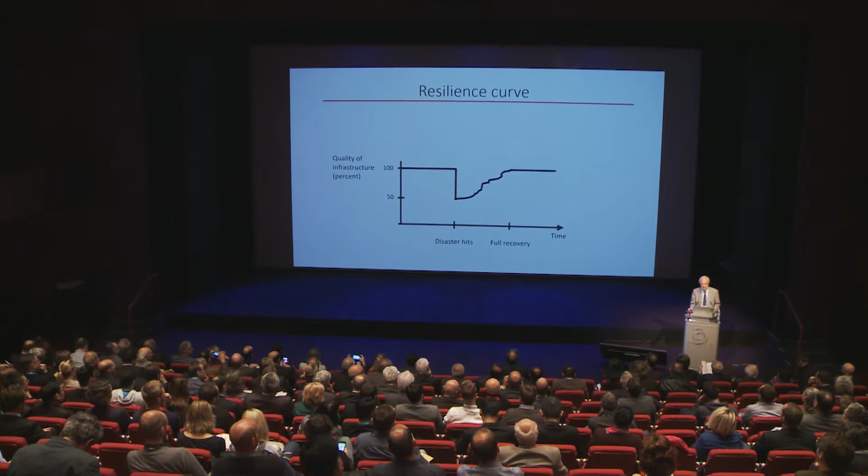This can be explained by looking at the so-called resilience curve, which shows the quality of infrastructure versus time. At the moment an earthquake hits, there is a sudden drop in the quality of infrastructure. If the structures are seismic resistant, this drop is small and recovery is quick. If the structures are not resistant, the drop is very large and the recovery is very costly and takes a very long time.

An extreme example is Haiti. As you know, there was an earthquake in 2010 with catastrophic consequences. The magnitude was not so large, it was only 7, but the consequences—death, wounded, homeless—were catastrophic. This was the most destructive earthquake that any country has experienced in terms of the number of fatalities relative to its population. The reason for this was inadequate construction practice due to poverty, lack of professionals in the construction industry, and no seismic code.

Another example, on the other end, is a developed country, Chile. In the same year, the magnitude was much stronger. Magnitude is a logarithmic scale, as you know, and this earthquake was almost 1,000 times as strong regarding the energy. In spite of this energy, the number of deaths was relatively low compared to the magnitude, but the damage was still extensive.

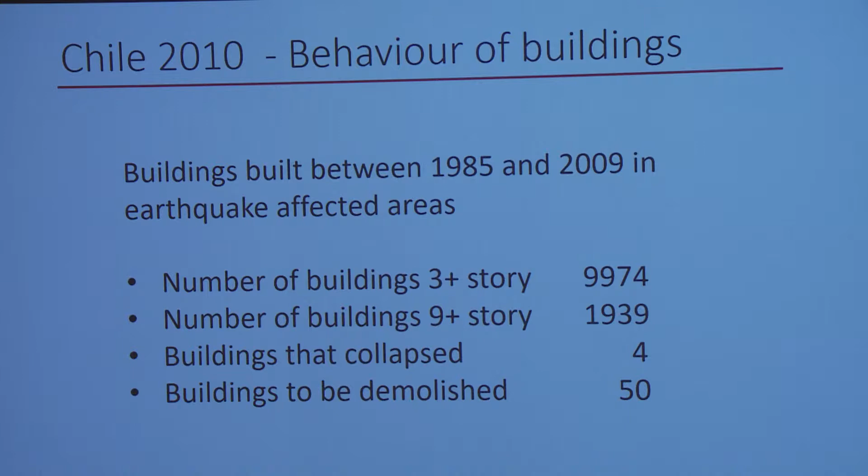So here we experienced very good behavior of engineered structures. Some data from taller buildings built in the last 20 years before the earthquake: only 4 buildings collapsed and 50 were to be demolished. This experience can also be followed and seen after other earthquakes.

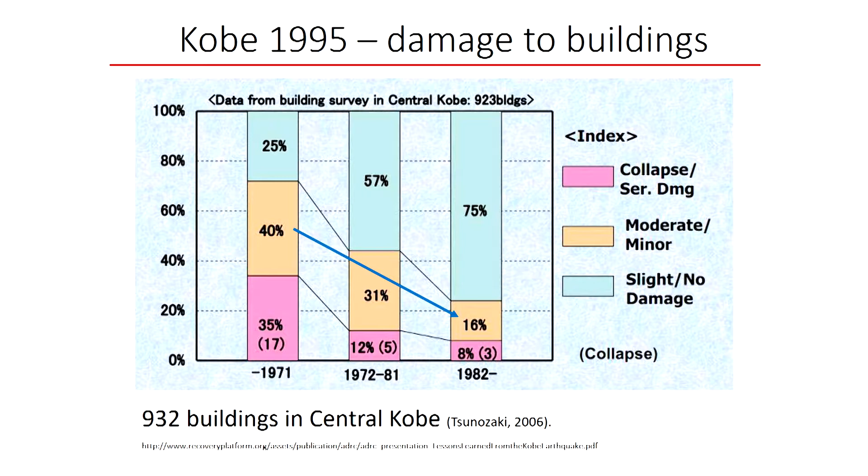So what we can see is that modern seismic codes are able to prevent, more or less, collapses of buildings. One example from the Chile earthquake: in the most hit area, the city of Concepcion, we found a building, a parking garage, without any single crack. But unfortunately, in the same city, there was one of these 4 buildings which completely collapsed due to some problems in design.

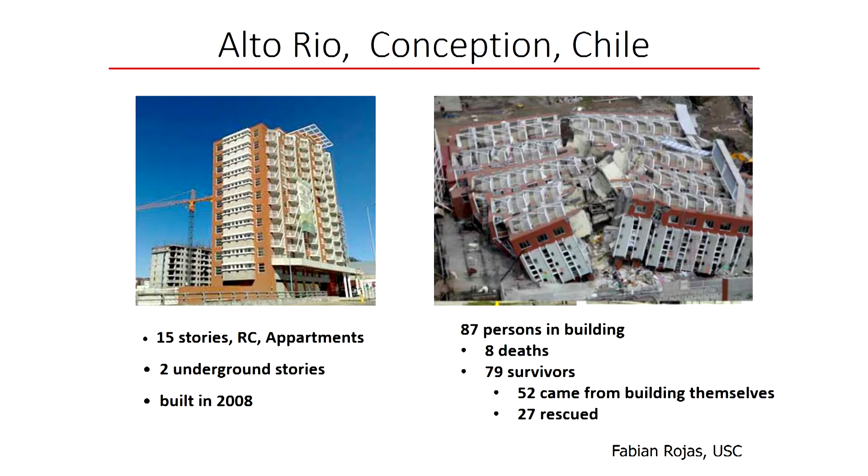This is the building Alto Rio before the earthquake. It was built just 2 years before the earthquake. It was an apartment building, and this is it after the earthquake. Still, it's difficult to believe, but 79 people survived this collapse.

So what we can say for new buildings is that modern codes provide seismic resistance if they are implemented in design and construction. So what is the potential problem? Review of design and control of construction. Earthquake-resistant design is not completely trivial, and some skills are necessary, and without review, things like what we showed before can happen.

I would like to emphasize something not very well known to the general public: the seismic code is mainly about saving lives, not buildings. For example, the aims of Eurocode 8, the European standard for earthquake-resistant structures, are three: human lives are protected, damage is limited, and structures important for civil protection remain operational. So please note, damage is limited, not prevented. This is for economic reasons.

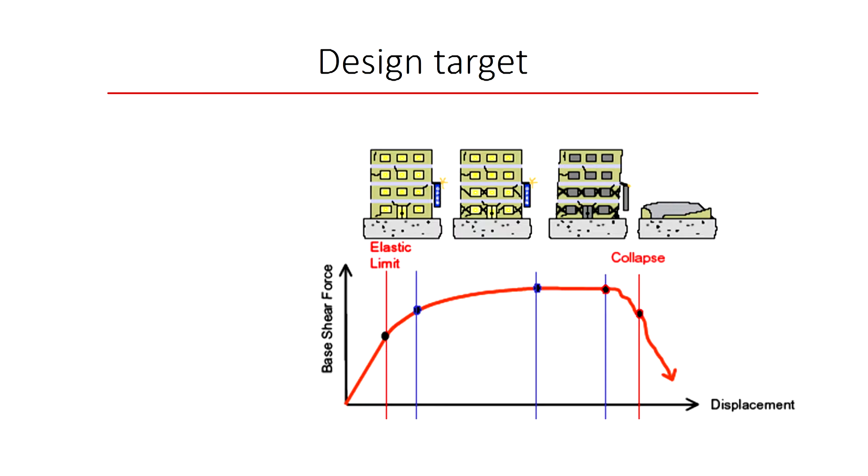I will try to explain this with a load-deformation diagram. In a usual situation, with vertical loads and small wind load, we are in the elastic region, meaning no damage. But in the case of earthquake, we design for rare earthquakes, about a 500-year return period, with about 10% probability in 50 years, so relatively low probability. So we design for life safety, not for preventing damage, for economic reasons, because earthquake-resistant design costs something.

Because of this, the tendency in most developed countries, like New Zealand, which had a very bad experience with the Christchurch earthquakes some years ago, is to decrease the damage, changing the design philosophy from life safety to less damage. But this costs money and takes time, and not many countries can afford it.

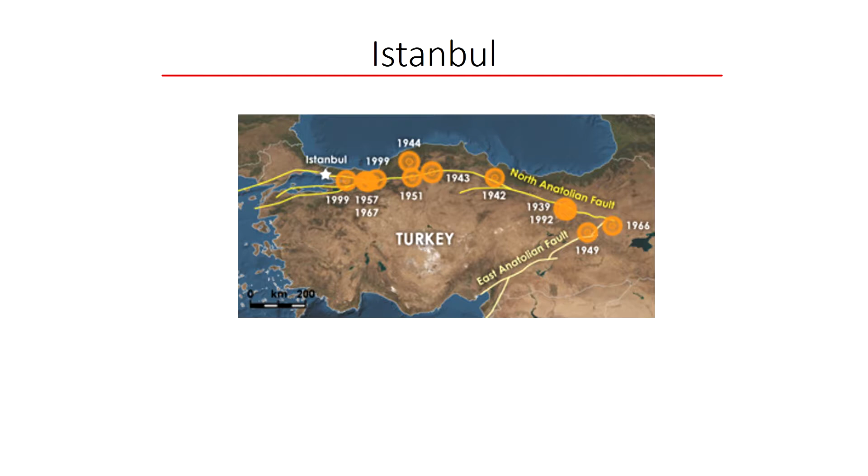This is one of the cities with the highest seismic risk in the world. What can be done? Unfortunately, not much.

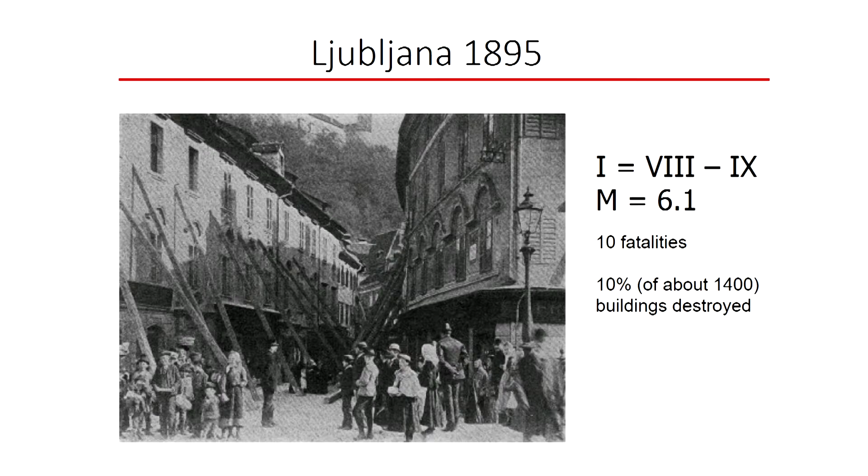A few words about Ljubljana, the city where we are today, my hometown. In Ljubljana, a moderate earthquake of magnitude 6 occurred in 1895. Ljubljana is not a big city, and at that time was even much smaller, but 10% of buildings were destroyed and removed. At that time we lived in the Austro-Hungarian monarchy, and the next year a building order was issued requiring measures for unreinforced masonry buildings.

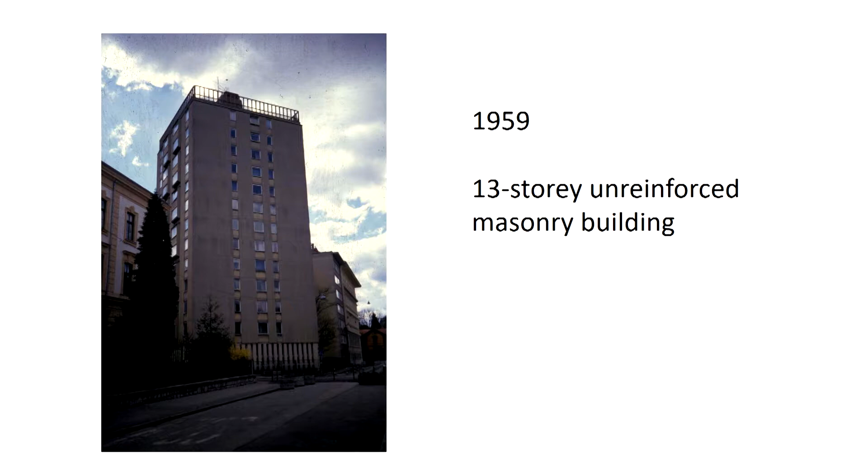But then, after the Second World War, there was a time of poor quality, quick construction, without seismic codes. At that time we had no seismic codes, and some buildings like this were built in Ljubljana. This one was built in '59, a 13-story unreinforced masonry building. You can see when the facade was removed, I took these pictures, that this is unreinforced masonry. According to today's standards, it could be maybe 2 or 3 stories maximum, not 13.

There are several buildings like this in Ljubljana with no seismic resistance, and you can even see that in one building they added an extra story on top. So what to do with these buildings? No, these are apartments with private owners.

Retrofit is expensive, and it's not only a financial problem, it's a problem of logistics. People have to go out for the period of reconstruction. So I'm afraid this is mission impossible in many cases. It was easier with a student dormitory, where the owner was the state, so there was no problem of logistics. This building was built in '63, demolished in 2004, and rebuilt in 2006. This is the easiest solution, of course, but not applicable everywhere.

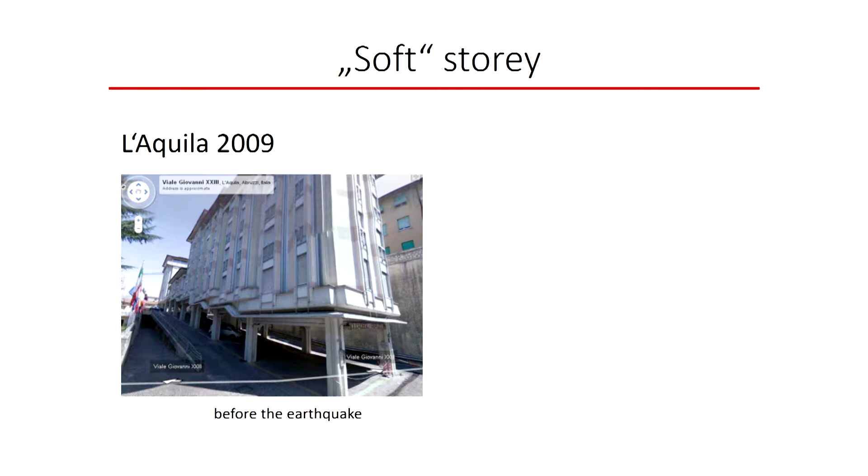So a few words about soft-story buildings. I always told my students this is enemy number one of seismic behavior. This is a hotel in L'Aquila before the earthquake. Everybody who knows something about earthquake engineering knows that such a building cannot survive a strong earthquake. And this is what happened in the earthquake—many people died here. I could spend my whole presentation just showing collapses of soft-story buildings.

I will finish my examples with the retrofit of an unreinforced masonry building. This is a building in Ljubljana, more than 100 years old, with wooden floors. What we did is a retrofit—we put ties from one facade to another to prevent the walls from falling out of plane. Actually, this happened to be my building, where I live.

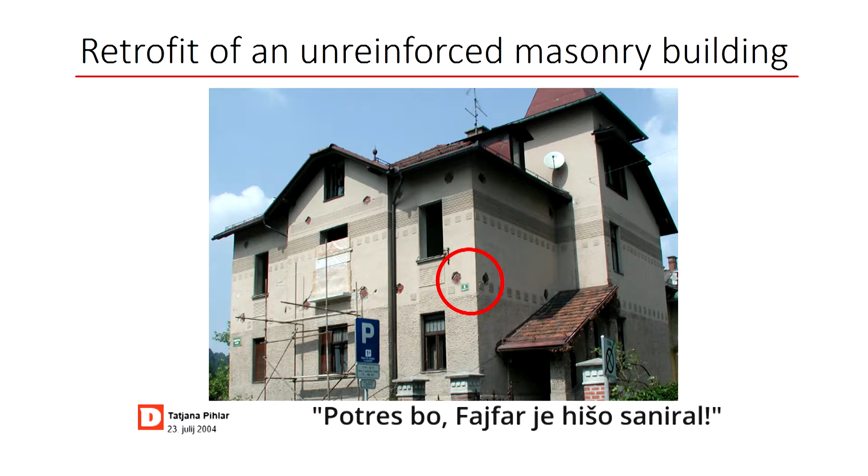Very soon after this retrofit, a moderate earthquake happened in Slovenia, and journalists came and we discussed different things. I mentioned that I had retrofitted this building, and the next day there was an article in the daily newspaper: 'potres bo, Fajfar je hišo saniral'—meaning an earthquake will happen, Fajfar fixed the house. You know this joke: there will be a very cold winter, the Indians are preparing firewood like crazy.

So let me conclude. Earthquake resistance of structures is the key element of seismic resilience. As far as new structures are concerned, codes are okay, but they have to be observed. Of course, they do not prevent damage, but the tendency is to minimize damage. The problem is old structures built before codes, or built without codes—there, retrofit is needed. Of course, not everything can be retrofitted, but it's reasonable to start with schools and hospitals.

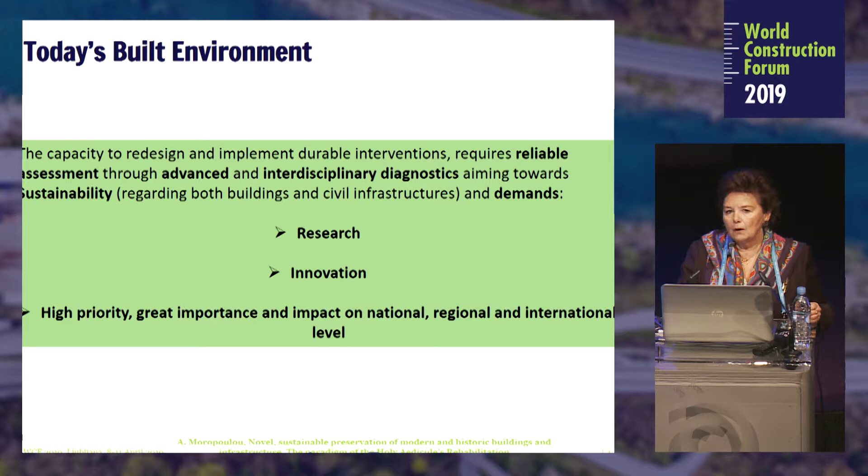At the same time, it is not by chance that 40% of the construction activity is dedicated to maintenance, conservation, and rehabilitation of buildings. At the National Technical University of Athens, we are dealing with the science and engineering of these efforts, and we know very well that research and innovation are the background on which we have to found this joint effort.

In our case, our experience in monuments preservation and concerning the monument rehabilitation, I'm going to present the Holy Aedicule of the Tomb of Christ in Jerusalem.

I might say that heritage is a lesson for all of us. Preserving heritage, we are talking with the monuments, and monuments are talking to us. And this is a lesson to learn concerning the preservation of our built environment and the resilience of our infrastructure.

As I've heard, and I was very pleased with this note from the UNESCO representative, it is a conscience of today that interdisciplinarity, merging capabilities and know-how, is the scientific basis in order to perform rehabilitation. Within this effort and the specific experience of the monument we dealt with, this unique monument is associated with communication, social awareness, and participation of humanity, which was enhanced and was necessary in this direction.

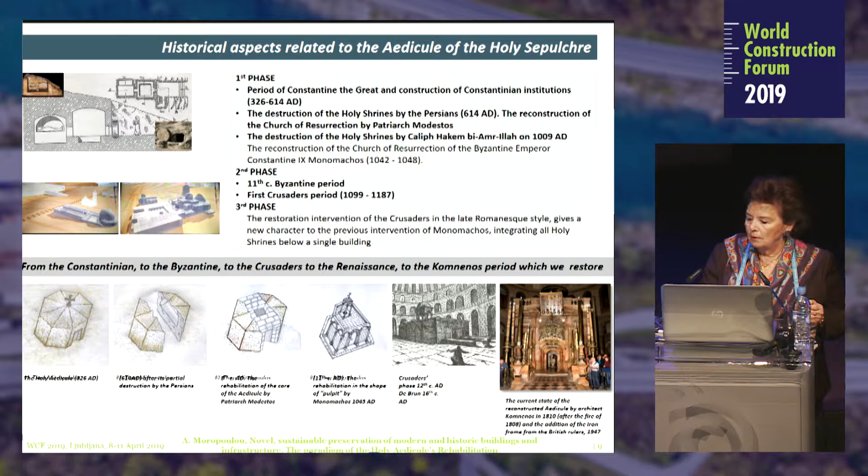The Holy Aedicule of the Tomb of Christ was a structure that from Constantine the Great passed through Byzantine, the Crusaders period, the Renaissance period, and the last restoration before ours, the one of Komnenos in 1810. The Ciborium, which is actually the specific structure to protect the Tomb of Christ, went from the octagonal structure to a columned structure, the Ciborium actually, to the mausoleum of the 19th century, the Baroque one.

Which we received absolutely deformed and sustained by the English mandate in 1947 with iron beams in the cage form you can see preserved, and which we delivered one year later in the form you can see.

This project started with the invitation by the Greek Orthodox Patriarch Theophilos III, and this was the reason that on March 15 this venture started, because for security reasons to the pilgrimage, the Israeli authorities closed the Tomb of Christ to the people.

I had the honor to comprise an interdisciplinary working team: Professor Korres from the School of Architecture, Georgopoulos from the School of Surveying Engineering, Spyrakos and later Mouzakis from Civil Engineering, and me from Chemical Engineering, Material Science and Engineering for the Protection of Monuments, leading this team. The methodology of the research concerning documentation, diagnosis, and the proposals for the intervention were integrated.

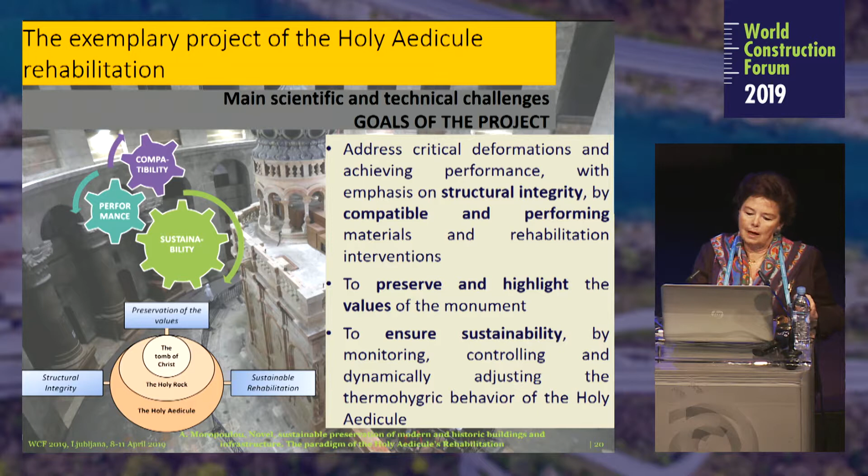The integrated coordination had to satisfy three goals: structural integrity with compatibility and performance, sustainability, and the revealing of values. Innovation was at the core of all this effort.

The interdisciplinary project was based on 3D digital documentation, a dynamic core space to integrate all information, to merge and fuse all capabilities and know-how. Architects, surveying engineers, civil engineers, chemical engineers, restorers, conservators, information technologists and engineers, archaeometrists, archaeologists, historians of art were working together, providing the basis for transdisciplinarity beyond the frontiers of engineering.

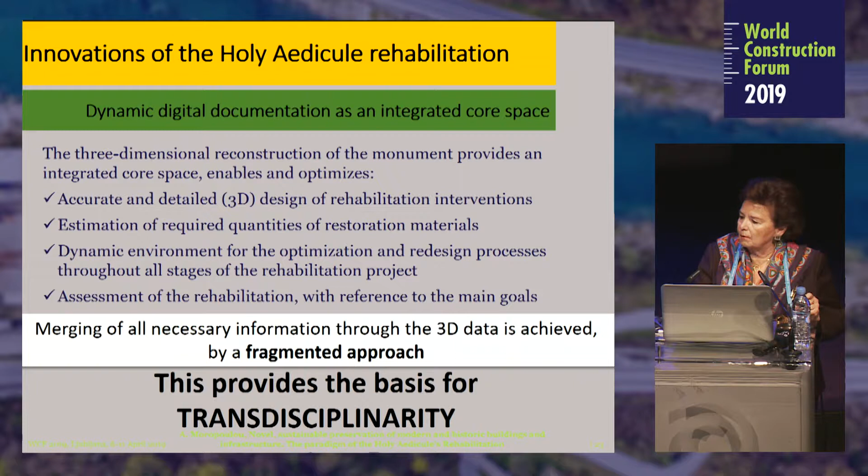Within the 3D digital environment, we were capable of performing continuous monitoring with non-destructive techniques to assess and evaluate our interventions, so that we could optimize our redesign if necessary, in real time, on the scale of the monument.

This innovative inspection of the non-visible layers of the Aedicule was really a major tool for the rehabilitation. You might see how ground-penetrating radar permitted us to estimate where the holy rock is, where the masonry of the various periods was extending, and to design the necessary interventions accurately, estimating materials at the 3D level of the model we were working with.

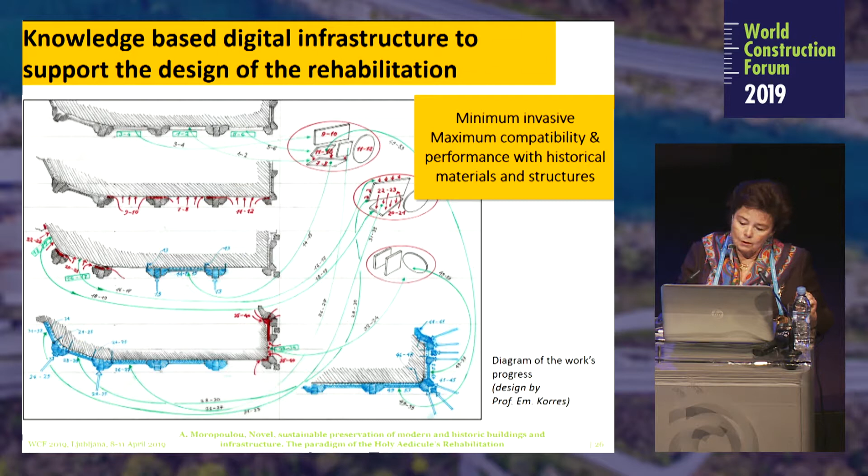The geometric documentation and materials characterization, along with the architectural documentation, permitted us to perform the structural assessment through realistic and dynamic finite element models, so we could select materials and structures for structural interventions within the time limit we had, with a project planning that was very accurate and very strict.

Compatible and performing materials were ensured by this integrated study, a first step for sustainability. I remember presenting 30 years ago at the European Parliament that if we have to sustain historic structures, we have to work with compatible materials, not stronger materials. That was the time we started to abolish strong materials, cement or resins, from retrofitting historic structures.

So here we ensure breathability and thermohydric behavior. We do not induce anisotropy. We have adequate mechanical behavior, and we do not introduce soluble salts, but mainly we aim for homogeneity, a homogeneous structural system. The iterative process of the main stages of rehabilitation was...

...one that started with removing the slabs of the Aedicule, retrofitting the inside masonry, and removing the degraded mortars, unifying the structural system by grouting, injecting compatible grouts, resetting the columns, sustaining the systems to be stuck together with titanium bolts and anchors.

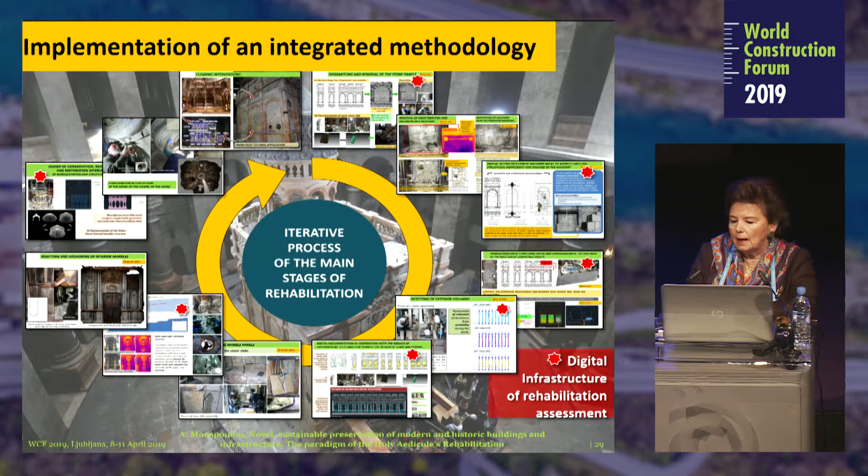For this reason, we organized upon the Franciscan Gallery the conservation laboratory where the numbered stones were removed, brought and conserved. We also organized, beyond the Tomb of Christ, an interdisciplinary laboratory in order to monitor all the phases of the works, and the teams were working day and night.

During the night in the Holy Aedicule, so that pilgrimage and the functions would not be ceased, and during the day at the Latin Gallery. The scientific team united these two ends of the 24 hours, working continuously in Jerusalem and Athens.

The implementation methodology was innovative in that the construction site was continuously open to pilgrimage, and the funding was crowdsourced. We started with zero, initiating the work with the World Monuments Fund and Mika Ertegun as a benefactor for one third of the cost, 3.5 million euros, with transparency, uploading all costs to the site of the Greek Orthodox Patriarchate.

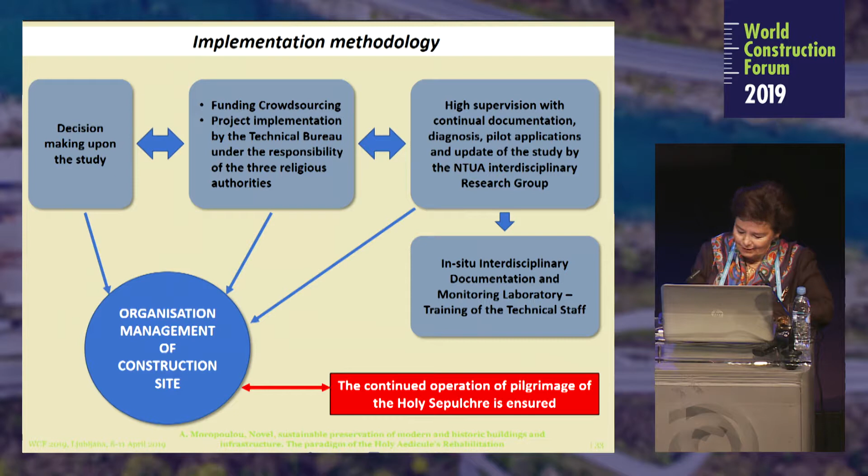We continued with the integrated management of the work, where the project owners committee, the three leaders of the Christian communities, worked with us in the steering committee; the interdisciplinary scientific team in green, and the construction site management team in blue, all working together from interface to interface, on the basis of scientific support by the assessment of non-destructive techniques.

Here you might see, for instance, how the assessment of the effectiveness of the grouting process was advanced by NDTs, in order to secure that the Holy Rock was consolidated, and to ensure that the interface with the Crusaders' masonry or the Byzantine masonry would be unified.

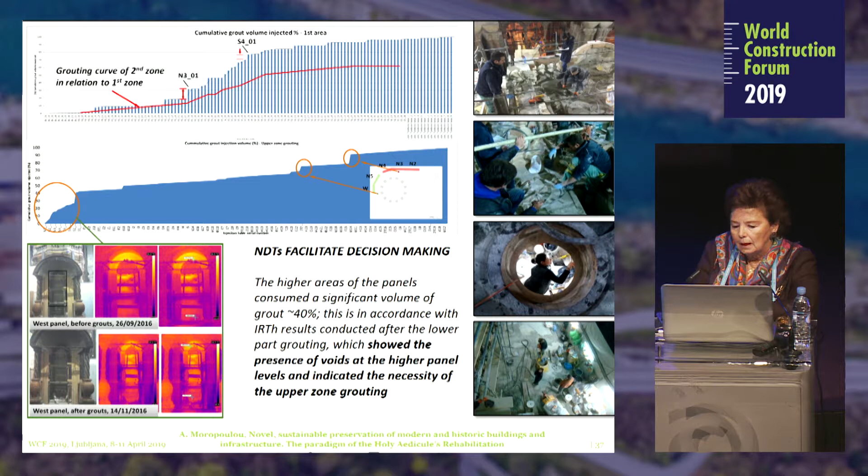The process of the works was facilitated by decision-making made on site upon the indications. For instance, the colors of the infrared thermography were indicating where we had voids to continue with grouting, or the ground-penetrating radar permitted us to assess that we had indeed consolidated the structures.

That means the innovation of non-destructive testing permitted, in all phases, documentation, diagnosis, monitoring, assessment, and implementation to perform the whole intervention upon the set criteria. At the end of the works, we had to ensure that this innovative methodology achieved the goals set: structural integrity, highlighting the values, sustainability.

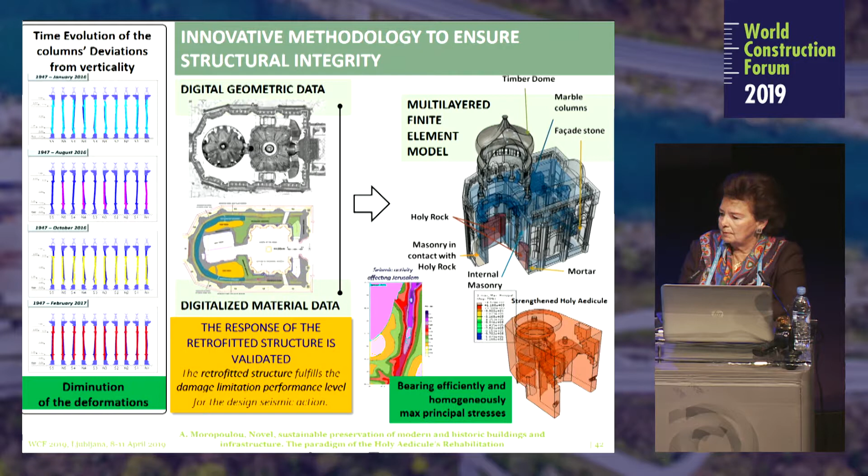When we assured, in comparison to the Freeman Report of the English Mandate of 1947, on February 2017, that we diminished the deformations and that the deviations from verticality arrived to zero, and that the bearing efficiency of the homogeneous structure was responding to the earthquake risks of the area, we cut the iron beams and we emancipated the Tomb of Christ.

The most important moment of this effort were the 60 hours when we opened the Tomb of Christ during grouting, in order to protect it from irreversible intervention. That was a unique moment because after 7 or 5 centuries, according to the historic sources, the Tomb of Christ was opened at a period when we had at hand the high technology to study it and reveal its secrets.

Non-destructive techniques permitted us, after a period of time when the energy disturbance of the atmosphere was coming to an equilibrium, to study the morphology of the burial monument, and by taking samples of the mortars that were connecting the slab upon the rock where the tomb was engraved, and the upper slab, the one we lifted.

We were able, through archaeometry, to estimate that it was Constantine the Great who put the first slab, protected and revealed the Tomb of Christ, and that during all periods of restorations, after a sequence of destructions, that means during the Byzantine, the Crusaders, the Renaissance period, we have evidence of the presence of these restorations.

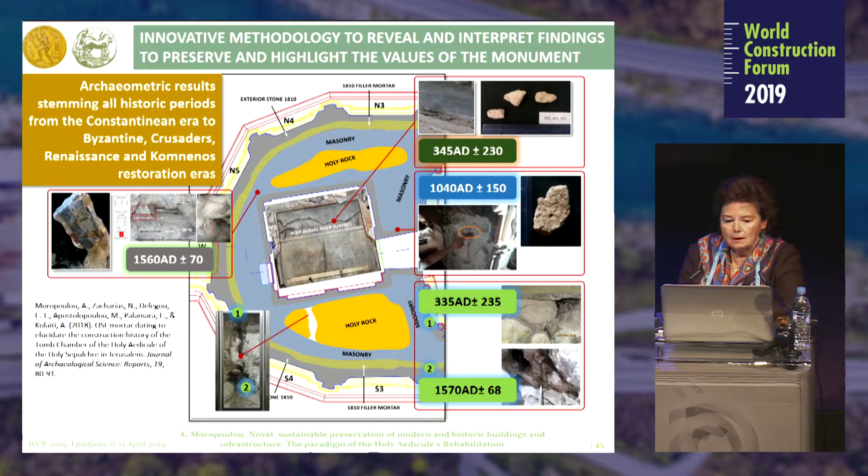That means the historic continuity of this unique monument was in front of our eyes, and it was ensured definitely by high tech.

Revealing the holy rock, the archetype material of the burial monument, through opening a window, was the first opportunity in centuries that pilgrims would see the holy rock.

Revealing the frescoes was bringing the myrrh bearers back to the burial monument, or restoring the dome, the timber structure, and revealing the moon, the sun, the rainbow.

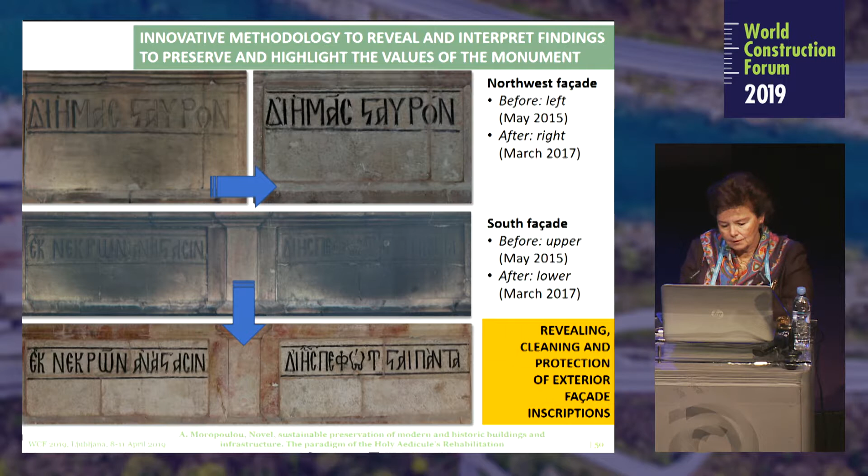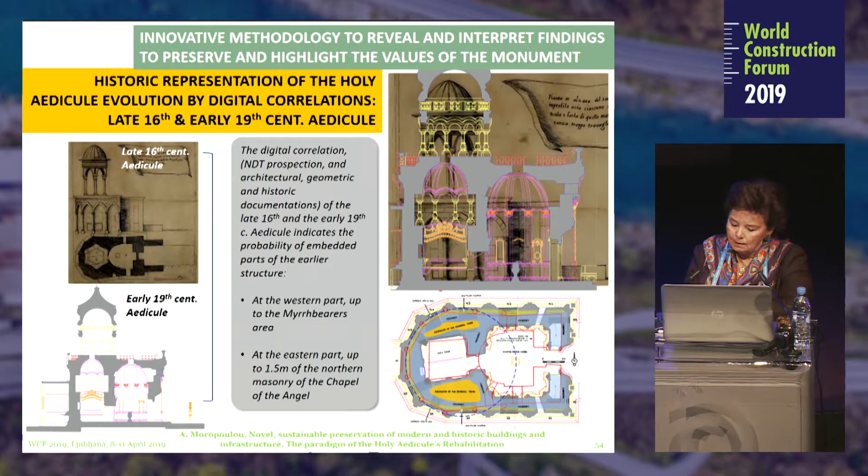Which enabled us, at the end, in the digital infrastructure we constructed, to study the architectural evolution of the monument during the centuries.

But concerning sustainability, a window is open to the future. The risk assessment shows that the rising damp of the underground area is still threatening this unique monument.

That was the reason that by delivering the monument in March 2017, we delivered the study to reveal the underground problem, which we could not do before. We did it, we studied while we were working.

Here, through robots, ground-penetrating radar, electrical resistivity survey, and electromagnetic probe systems, we revealed all the channels, tunnels, cisterns, the places where the rainwater from the Christian Quarter Road 10 meters above was falling, and the sewage system of the whole Holy Sepulchre, which was disposed underneath the Holy Rock.

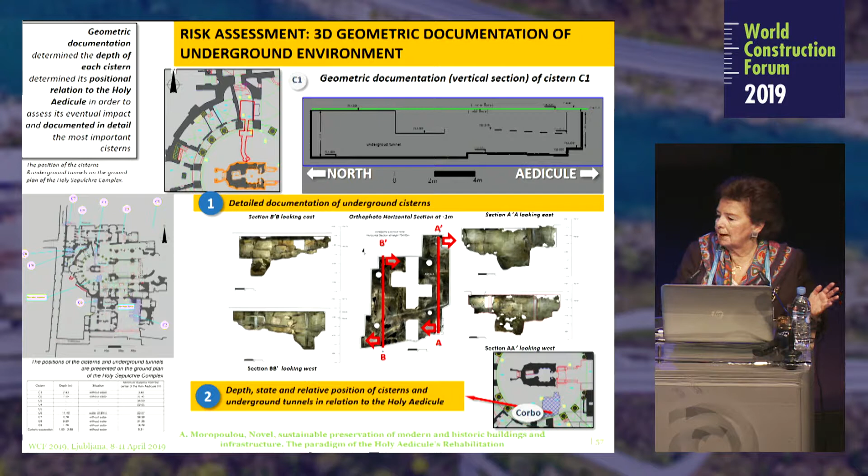We geometrically documented this, and found all the archaeologically important structures from Adrianos or from Constantine the Great, and studied a drainage and ventilation gallery which would underpin the Rotunda area, the general area, with a peripheral piping network for sewage and rainwater disposal, in order to negate the differential settlement of the Holy Rock, which would be a threat and a risk.

A multimodal sensoring was induced before delivering the Holy Aedicule, for thermohydric behavior, for seismic monitoring, and for verticality, for displacement from verticality.

This work has the names of all the people. It's a collective effort that worked for it on all levels.

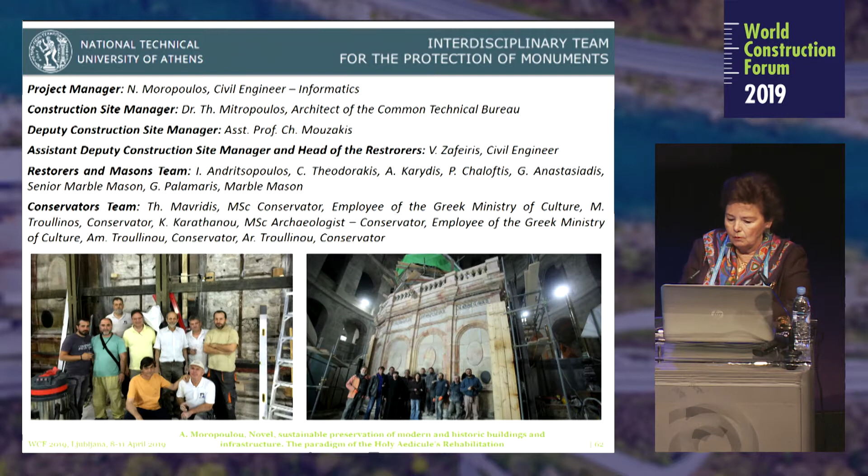At the completion of the work, the ceremony organized by the three Christian communities was of ecumenical level, with all the diplomatic and political representatives of the conflagrated Middle East there. That was the major challenge: this monument and this work were not only uniting Christianity, they were uniting a world in crisis and in conflict.

And social accessibility, bringing the world to the tomb of Christ, which was an outcome of a communication strategy, and the opening of the tomb of Christ, broadcasted by the National Geographic Society, brought more than 2 billion people to kneel virtually in front of the tomb of Christ, and the media of the world to refer to it in a continuous way.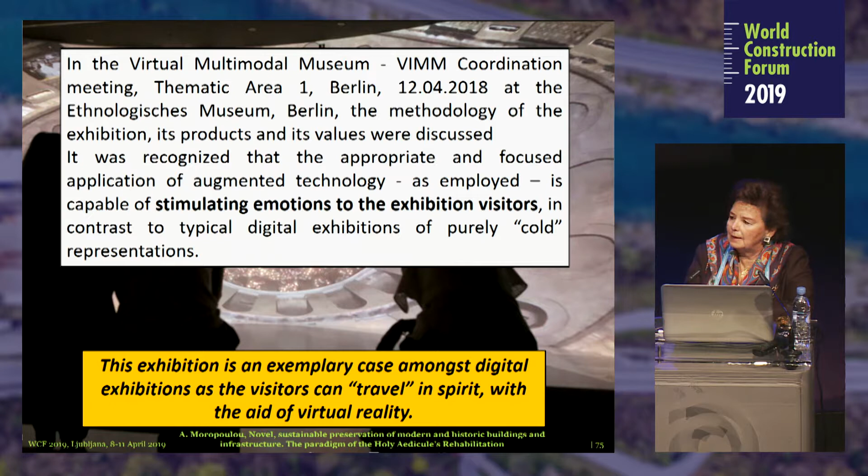And the virtual exhibition, based on advanced digital techniques, in Washington in 2017 and in Athens, Greece in 2018, is traveling now in spirit — the world is going to Cyprus. It has traveled by presenting the work to a European community as an exemplary restoration work in the year 2018, which was dedicated to cultural heritage, and now is opening horizons with Oxford, with the Vatican, with all of the world for research, transdisciplinary research.

I could say that the Tomb of Christ, within the two years we studied and worked there, became an open monument to research and education. The status quo that did not permit other interventions, and UNESCO knows that very well, was open to ideas and young people. Today, research is continuing, and we are performing the multi-layered data management and fusion, on the level of the platform we are developing to share this knowledge with the world.

We started with a fragmented digital implementation of merging all the various disciplines' data. Today, this becomes a holistic approach, and it brings us to a digital-driven preservation of cultural heritage.

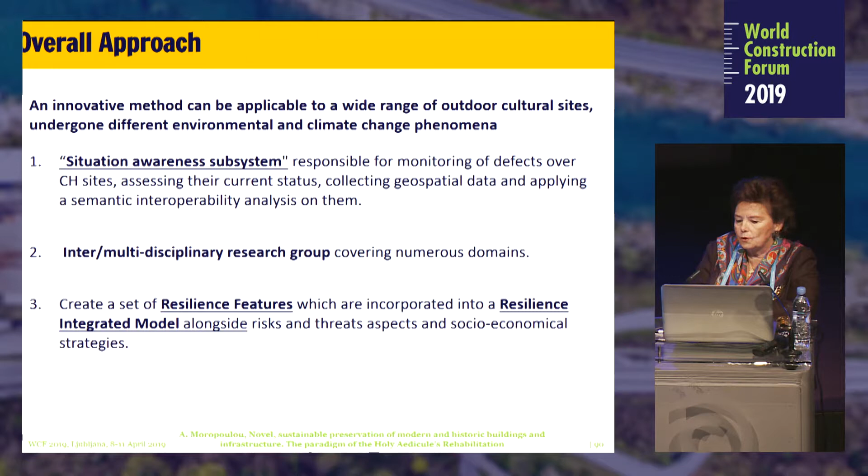Today's built environment needs resilience modeling, and resilience modeling is not only a technical issue, it is a situation awareness issue. We know now that towards a resilience integrated model, we have to include society. Assuring resilience means we have to ensure the feasibility of funding as well.

And the strategic impact has to take into consideration the United Nations Agenda for 2030 for Sustainable Development, and the UNESCO requirements, in order to keep in the list of World Heritage Monuments the monuments that are listed.

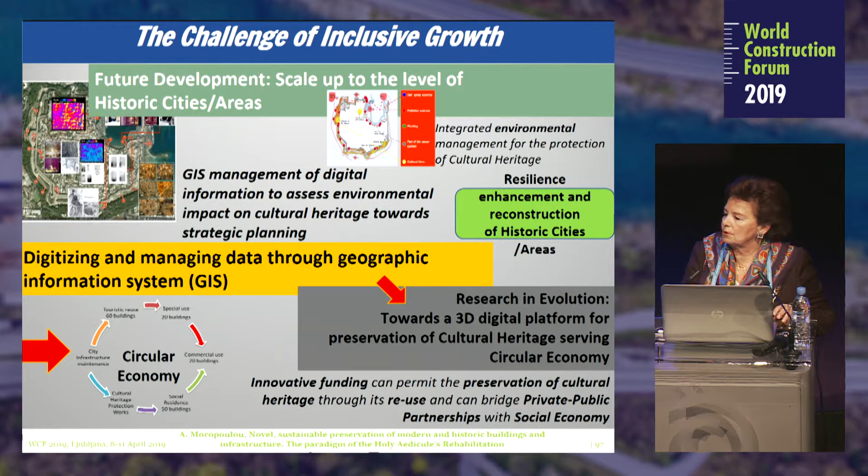Finally, the challenge of interdisciplinarity and novelty is joining the challenge of inclusive growth. And the cities of our world — I'm speaking of my city, the medieval city of Rhodos — need an integrated approach, and this is the future. The research evolution is bringing us to circular economy, to preserve cultural heritage through its reuse, bridging private-public partnerships with social economy. Thank you very much.

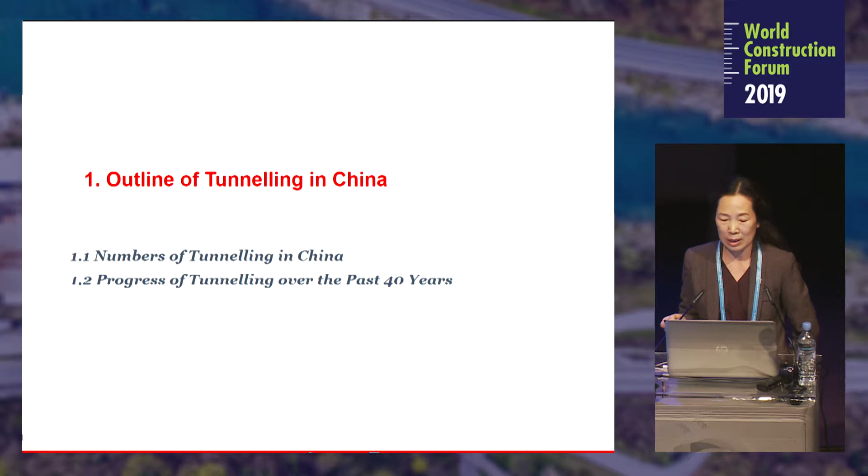Regarding tunneling in China over the past 40 years, I would like to share with you the numbers and the progress. China's 40 years of reform and opening up to the outside world has brought huge changes to this country since 1978, including China's booming economy, huge investment in infrastructure, a dramatic increase in Chinese people's income, and dramatic development internally. That's what I'm going to talk about.

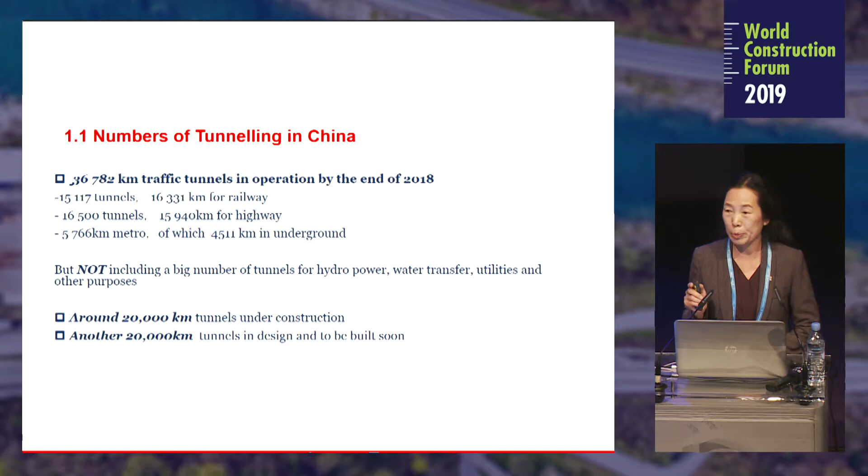Here you can see some numbers by the end of last year. China has built around 36,000 kilometers of traffic tunnels, including railway, highway, and metro, but not including tunnels for other purposes like water transfer and utilities. At the same time, around 20,000 kilometers of tunnels are under construction, and another 20,000 kilometers of tunnels are to be built in the very near future.

It's quite challenging for me to summarize the progress of tunneling over the past 40 years because a lot of things happened, but I would like to give you some keywords. Keyword number one is about amount. A huge amount of tunnels have been built, around 45,000 kilometers for transit tunnels and other purposes. Especially in the past 5 years, a lot of tunnels have been put into operation, including railway, highway, and metro.

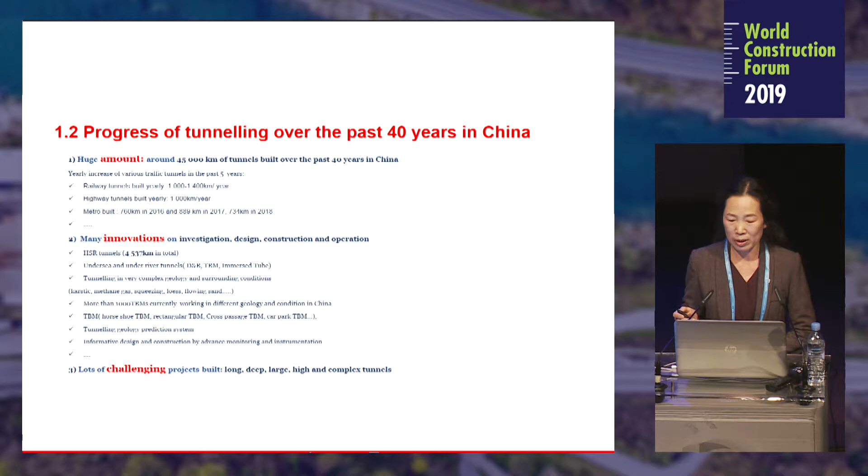Keyword number two is about innovations. A lot of innovations have been made in investigation, design, construction, and operation. Because of the time limit I cannot go into detail, but keyword number three is about challenges. Lots of challenging projects had to be built, including long, deep, large, high, and very complex tunnels. I'd like to share with you the challenges and achievements over the past 40 years.

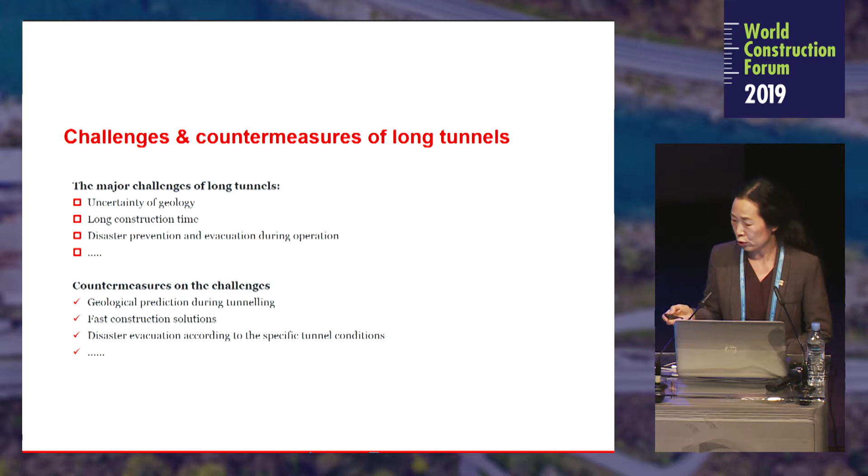It's quite long. For the challenges of building these long tunnels, I think they include uncertainty of geology, long construction time because the tunnel is so long, as well as disaster prevention during operation. So I will show you how we deal with these challenges.

First, we use geology prediction during tunneling because it's quite challenging to know exactly the geology before excavation. It's very important, and now it's a compulsory procedure to do geology prediction during tunneling. For the conventional method, drill and blast, it's quite easy because you can do it from the excavation face, but during tunneling by TBM, by machine, it's quite challenging because you cannot see the excavation face. So in this case, we need a special geology prediction system.

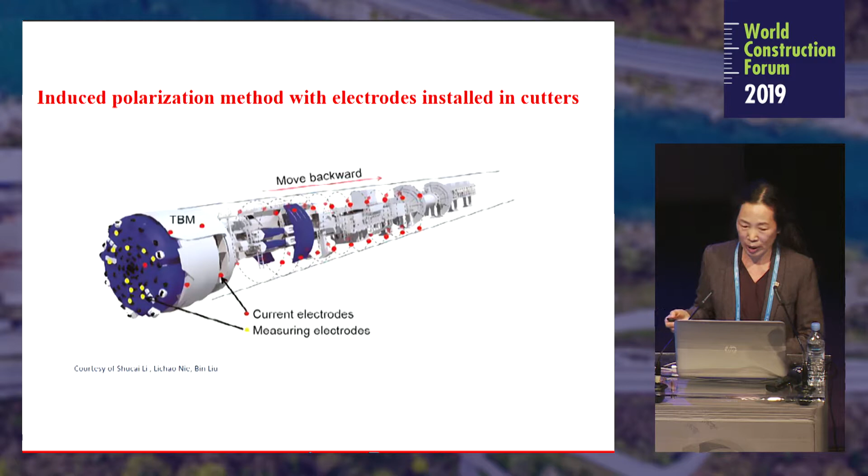We developed two different systems. One is what we call the induced polarization method, with sensors installed in the cutter head and also in the backup system, so we can detect the geology ahead of the TBM automatically. The other system has no sensors installed in the TBM, because some TBM manufacturers are not happy to have extra sensors installed. Instead, we use the vibration from the TBM cutting rock as a signal, and then we can detect the geology ahead. Both systems have been used quite a lot in different projects in China.

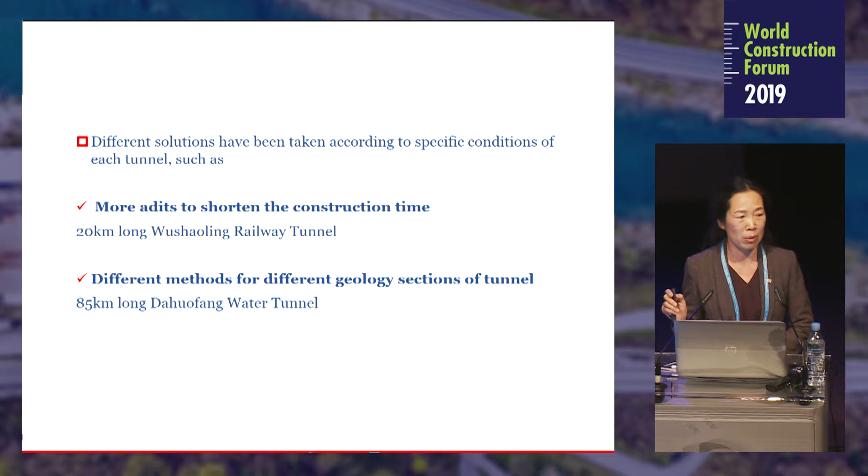The other solution is about faster construction. There's no single solution for different long tunnels, but I'd like to share two cases. One is Wushaoling tunnel, 20 kilometers long with 2 parallel tubes. This tunnel was the bottleneck of a very busy railway, so the earlier operation, the better. We used 13 inclined shafts, different inclined shafts, to speed up construction time.

The construction time was shortened from 5 years to 2.5 years. After 2.5 years, these 20 kilometers of tunnel were already finished and put into operation. That's due to using more access points.

Another case is the Dahuofang water transfer tunnel, an 85 kilometer long tunnel. The geology here is very poor, very fractured, with a lot of groundwater, but this part is quite shallow. In the rest of the tunnel, the rock is good, but it's very deep, which means it's difficult to have more access points, more adits.

As a result, we used drill and blast conventional method for this part with more inclined shafts, and used 3 TBMs, each for 20 kilometers. The construction time for the excavation only took 3 years, and the maximum advance rate by one TBM was more than 1,000 meters per month.

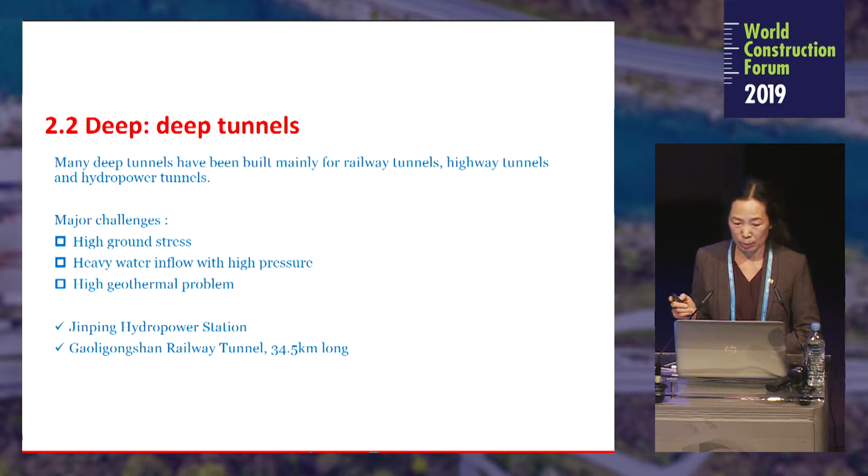Regarding deep tunnels, of course many deep tunnels have been built. I think the major challenges for deep tunnels include high ground stress, heavy water inflow, and geothermal problems. I will share two cases.

This is the Jinping Stage 2 hydropower station. I think many of you already know this project. It was very challenging, with 7 very deep and very long tunnels, and the maximum depth is 2.5 kilometers. It's very deep. During construction, very serious rock bursts occurred, as well as water inflows with very high water pressure. You know how much the pressure was?

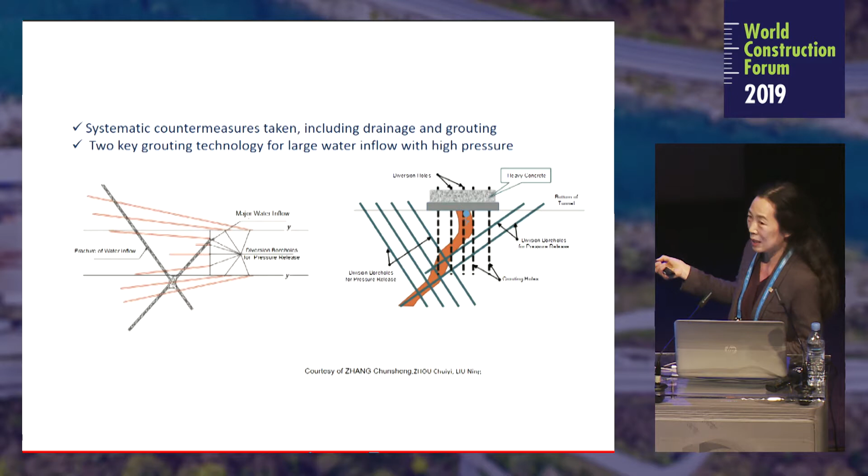This is more or less the same philosophy. Of course, for deep tunnels, rock burst is quite common. For this project, we have around 11 kilometers of tunnel with this kind of problem. So we use repeated maintenance of the surrounding rock, blasting for stress release, as well as strengthened support to maintain and adapt to the deformation and maintain the structure. Finally, that project was completed and put into operation in 2014.

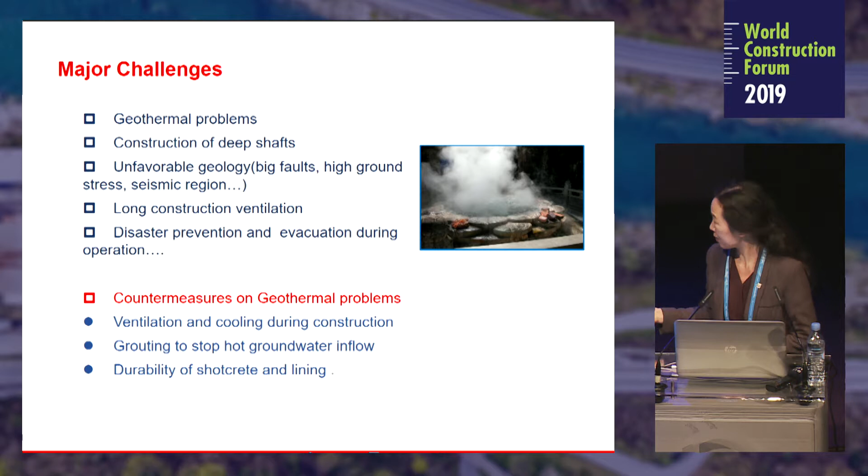Regarding large tunnels, we use different methods to build them, including conventional method, TBM, immersed tube, etc. I will share several interesting projects. This one is the Hong Kong-Zhuhai-Macau immersed tube. It's the very largest immersed tube at the moment, linking Hong Kong, Zhuhai, and Macau.

There's a short video film I would like to share with you, but I don't know how to do it. Okay, done.

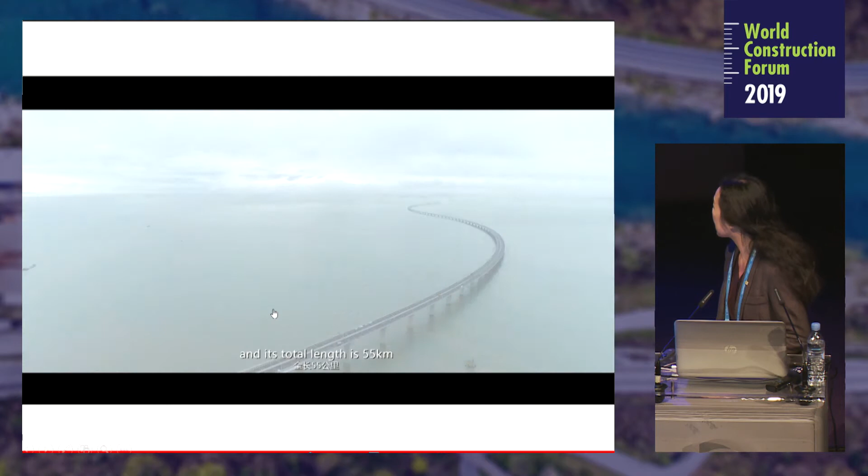Connecting Hong Kong and Macau at the west, its total length is 55 kilometers. The island and tunnel engineering construction consists of 2 artificial islands with areas of 100,000 square meters each, and a 6.7 kilometers long immersed tunnel, which is so far the only deeply buried immersed tunnel, as well as the longest highway immersed tunnel in the world.

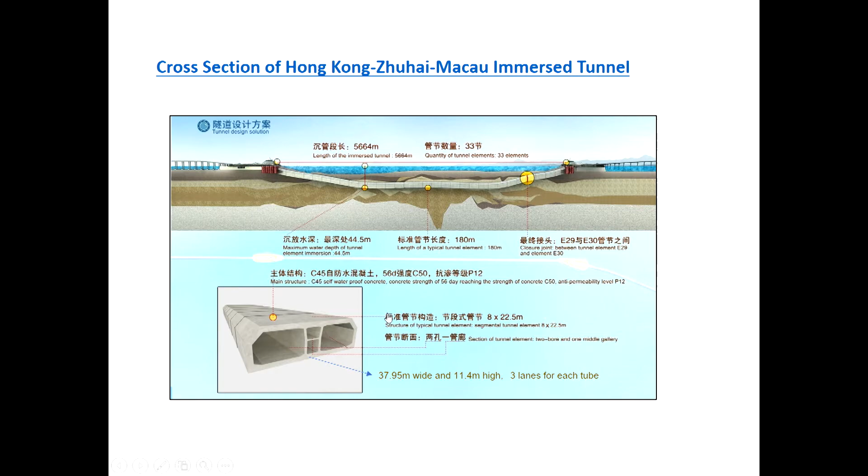Okay, so because the video is quite long, I just cut a very short part. This immersed tube links 2 artificial islands, around 6 kilometers long, and it's quite a big one - around 38 meters wide and 11.4 meters in height. This one was already finished and open to traffic last October, and this project was the major tunneling project of ITA last year.

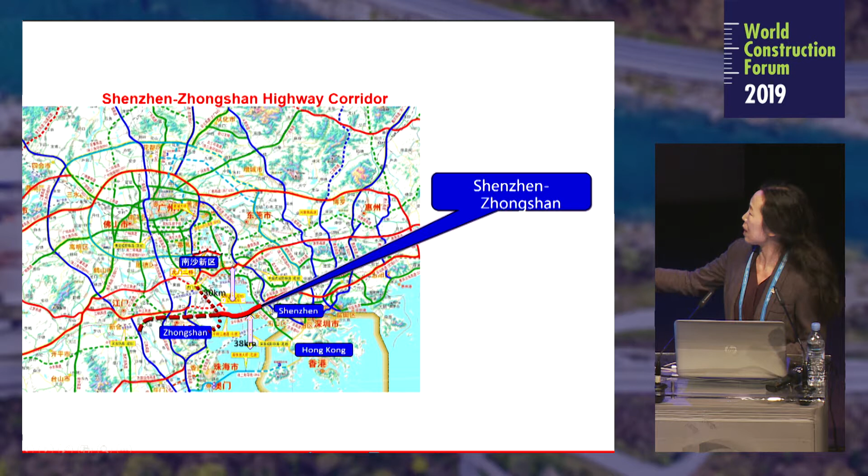At the same time, we have another similar project under construction. You can see this is the Hong Kong-Zhuhai-Macau project. I'll just show you - this is the Shenzhen-Zhuhai corridor. Yeah, that one. I'm sorry, this one - this is Shenzhen, Zhongshan, this is Guangzhou.

So this is another corridor under construction, also a combination of bridges and immersed tube, with another artificial island. This one is even longer and bigger than the Hong Kong-Zhuhai-Macau immersed tube, and it's a steel structure, not concrete. You can see it's even bigger - 46 meters wide, 9 meters bigger than Hong Kong-Zhuhai-Macau, with 4 lanes each way. It's under construction and also quite challenging.

We also use conventional methods to build large tunnels. Here you can see Beijing and Zhangjiakou - these are for the high-speed railway, built especially for the 2022 Winter Olympic Games in Beijing and Zhangjiakou.

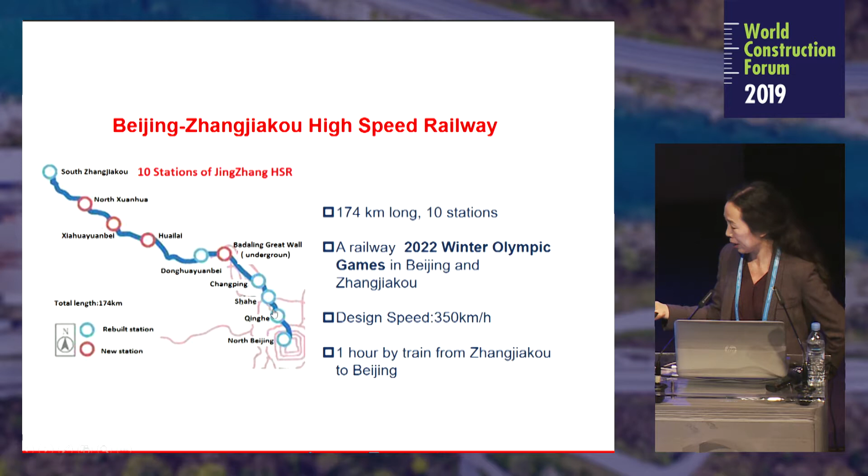So there's a very long tunnel here, just under the famous Great Wall. It's around 12 kilometers. And in this very long tunnel, there's a very big underground station for a high-speed underground railway, currently under construction.

It's very big, with a building area of about 36,000 square meters. And the construction time for this railway is 3 to 3.5 years.

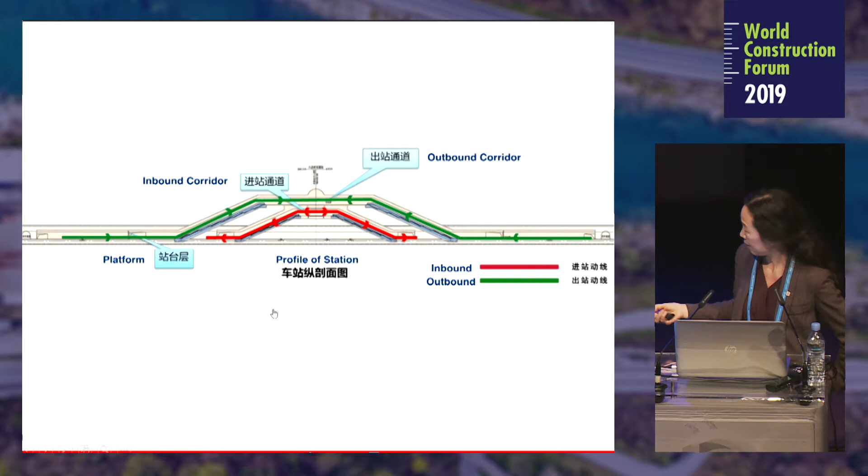So you can see the plan view of this station, and the profile for the tunnel. The bottom level is for the train, with inbound and outbound corridors above, so 3 levels total. There are 78 tunnels under this station, including one for a large span.

This is under construction, and this is after excavation. We also use TBM to build large tunnels.

This is the case under the Yangtze River, also 2 tubes, but a combination of road tunnel and metro tunnel. On top are 3 lanes per road, and underneath is for metro line number 7. This is in Wuhan, and this project already opened to traffic last October.

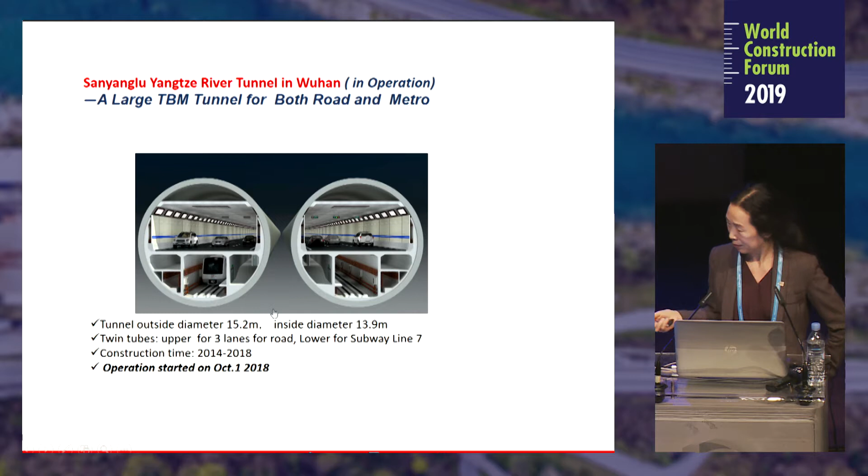At the same time, we have another similar project under construction in Jinan city. For this kind of design, we need to optimize the use of space, because the bigger the tunnel, the more expensive it is. We use this section for smoke extraction for the road, and this one for smoke extraction for the metro tubes, so we need to optimize the use of the cross-section.

Regarding tunnels at high altitudes, I will show you 2 projects: one for railway, and the other for highway. This is the Qinghai-Tibet railway.

I think this is the longest and highest railway, because the length is 1,100 kilometers long, but 960 kilometers is at an altitude of about 4,000 meters, and the highest point is more than 5,000 meters. There were a lot of challenges.

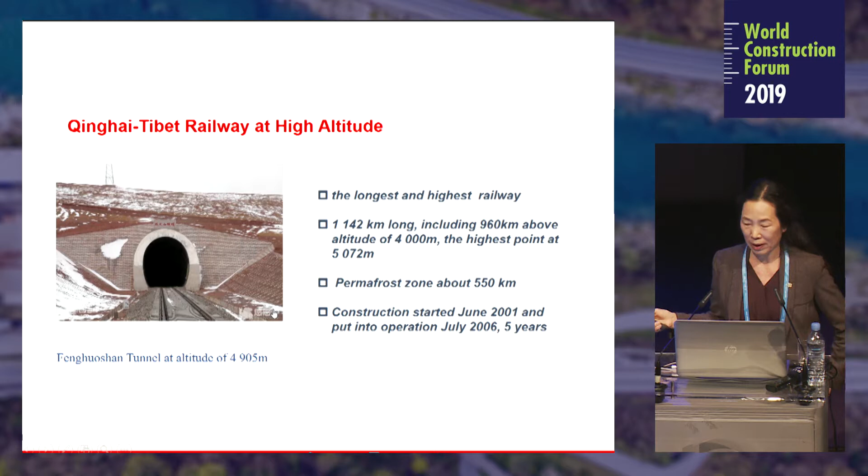You can see this could be the highest railway tunnel, because the altitude is nearly 5,000 meters, and the construction time was only 5 years.

Regarding tunneling at very high altitudes, I think the major problems include freezing and thawing ground, and also hypoxia problems. At high altitudes there's a lack of oxygen, so even the machines and equipment are not so efficient. You have to use electrified equipment as much as possible, because diesel power equipment efficiency is sometimes not good enough. We also need to consider the health of the laborers, due to lack of oxygen.

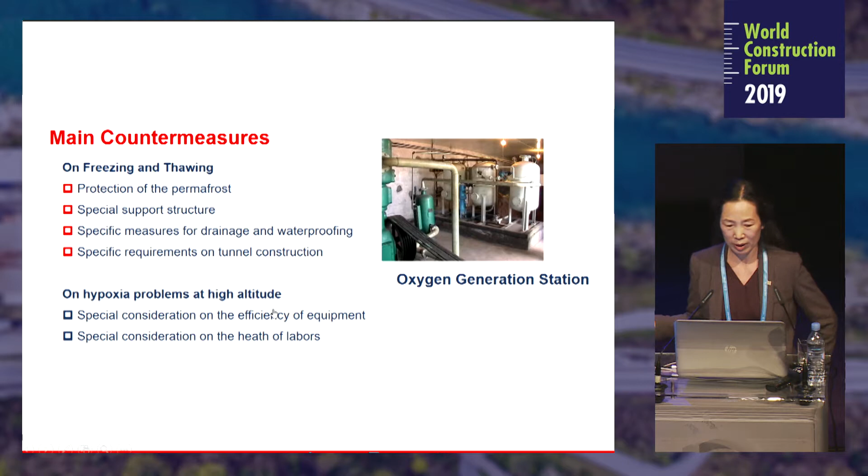So we also use an oxygen generating station to supply enough oxygen. It was very challenging. Another case is a highway tunnel.

But now it's very easy with the tunneling solution. Only 10 minutes for 9 kilometers, a very comfortable situation, and the elevation is reduced from 5,000 to 4,300 meters. So I think tunneling improves people's life, and also saves people's life.

I would like to share some complex tunnels, but I don't think we have time to go into detail. There's a lot of tunneling in complex geology, including karstic, thermal gas, squeezing, flowing sand, loess, etc.

We also built quite a lot of tunnels in challenging urban areas, including underground interchanges. We use a lot of interchanges, but usually they're bridge interchanges - we built several underground interchanges, and other tunnels in very sensitive grounds near very sensitive buildings.

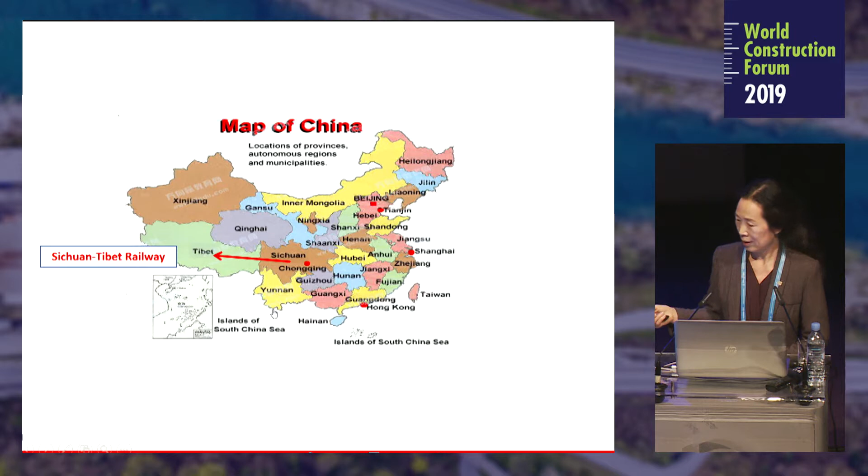Regarding future development, I would like to share two very challenging projects. One is the Tibet-Sichuan Railway, around 1,700 kilometers long. You can see the geology is very challenging, and 80% will be in tunnels.

There will be a lot of long, deep, and high tunnels to be built. I will show you some of the long tunnels - the longest one is 42 kilometers, plus several others. I think the total length of tunneling could be around 1,000 kilometers.

Another project is an undersea tunnel linking Dalian and Yantai. It will be a 123 kilometer undersea tunnel.

Also very challenging because the geology here is also complicated, and it's a seismic area, and it's so long. So we need to consider how to ventilate it, and how to prevent disasters, etc.

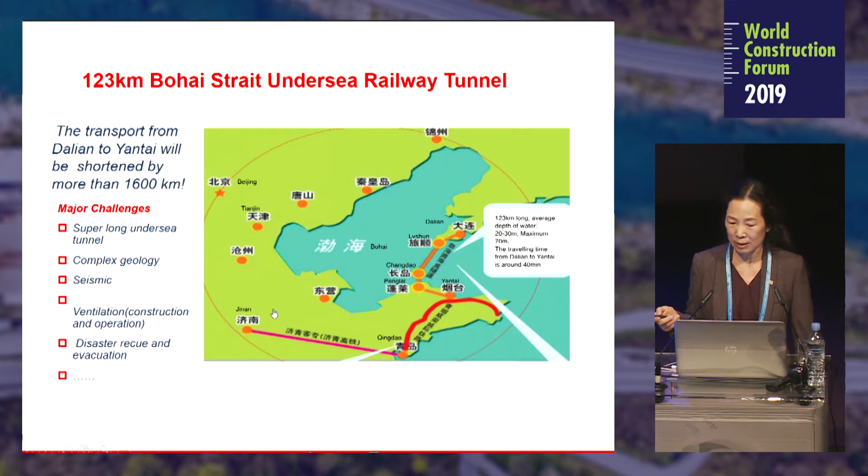So these two projects will be built in the future. Finally, great achievements have been made on tunneling over the past 40 years in China.

I think these achievements would not have been possible without knowledge sharing, experience sharing, and even encouraging successful projects internationally, while the development of tunneling technology in China also contributes to our international tunneling industry.

Not only in China, but in other parts of the world, I think we have more challenging projects to come. So the International Tunneling Association and International Engineering Society need to deal with these challenges together, with even longer, even deeper, even larger, even more complex tunneling projects.

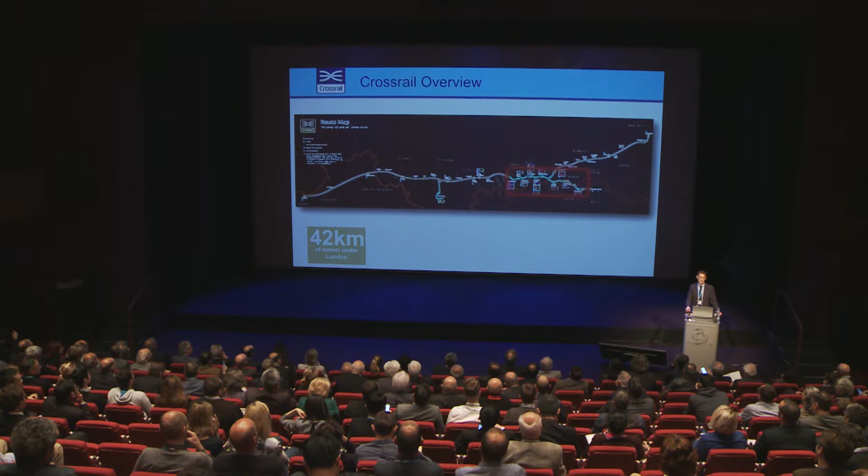So Crossrail is a project that runs from east to west across London. In the central section, which runs right under the centre of London, there were 42 kilometres of tunnel drilled. This will eventually lead to 200 million more passenger journeys a year.

And these stations are huge when compared to existing London Underground stations. We're often finding that with a lot of the stations, the Crossrail station would span 2 existing London Underground stations. There's going to be 24 trains per hour in the central section when it's finished, and it will increase London's transport capacity by 10%.

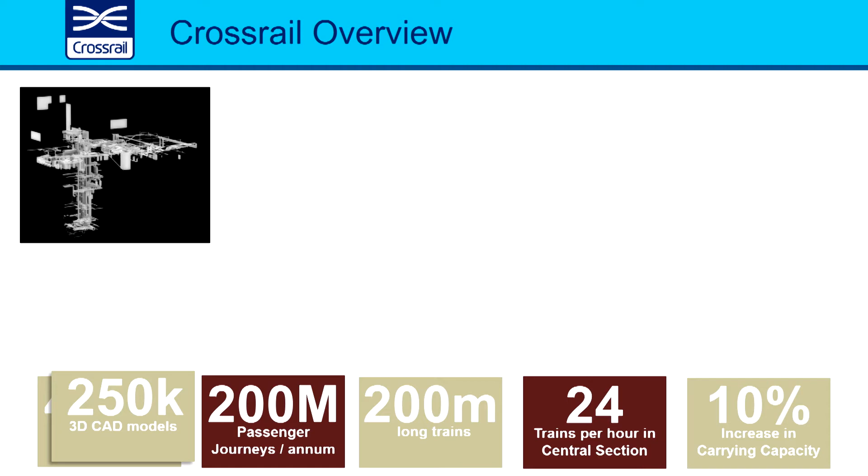In the design and construction, we've used 250,000 models, including 3D models. We've got 5 million documents kept in our document management system, 1 million assets and equipment across the project, 500 million GIS features, and GIS was a central part of our BIM strategy. The total cost is now over £17 billion.

Also, we had artwork across the Crossrail project. This was all privately funded, so over £2 million worth of privately funded artwork at many of the stations, if not all. And a whole new fleet of trains.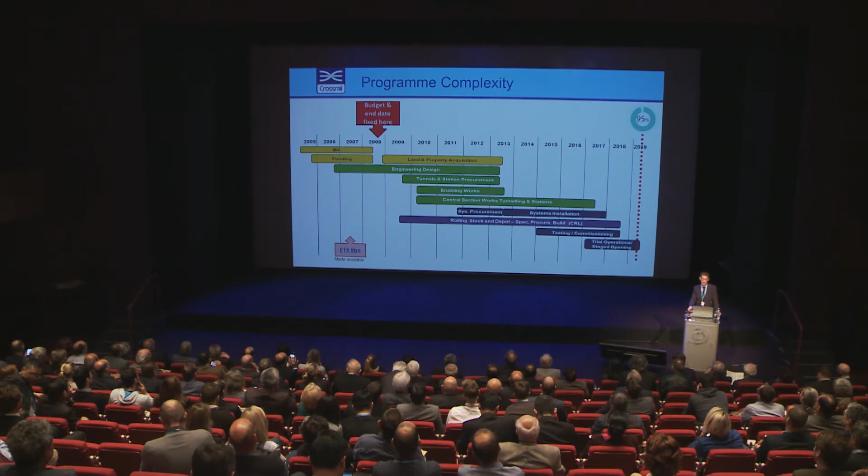Project complexity: the bill went through Parliament back in 2005 when we were given the go-ahead to start Crossrail. The budget was fixed here at £15.9 billion. As construction started and as the design developed, this increased to 17.8. But then the government came in, had a review of that, and dropped it to 14.8.

As construction has continued, and due now to complications, you may have heard that we're now delayed delivering Crossrail. The price is looking like going back up to 17.6 billion.

Also, there's massive contractual complexity. Each of these contracts across Crossrail need to be able to use the information that other contracts produce. So we needed to be absolutely sure of the reliability of the information we were asking for and that was being delivered, so that each contract could use the information that other contracts were providing, and know where to get it and rely on that information.

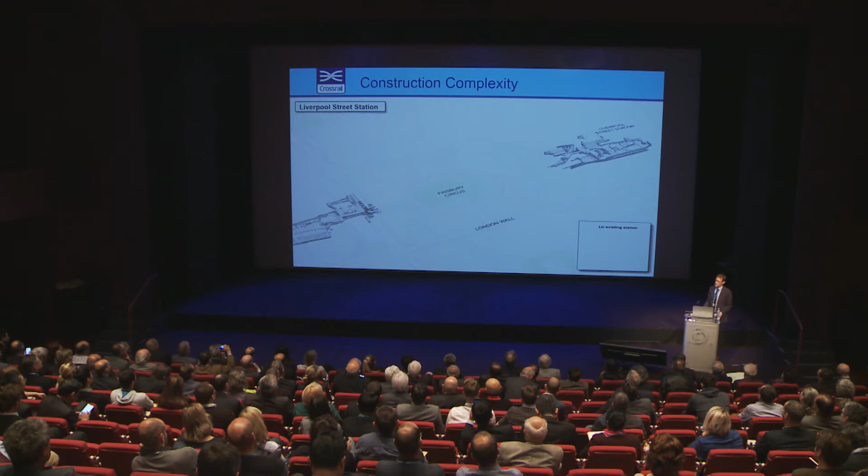So the construction complexity. This shows Liverpool Street Station. These are existing London Underground stations - the Circle Line, the Central Line and the Northern Line - and then there's the Crossrail station in the middle. As you can see, Crossrail spans 2 existing London Underground stations, in the heart of the business district in London, with huge skyscrapers, deep piles and a very challenging construction.

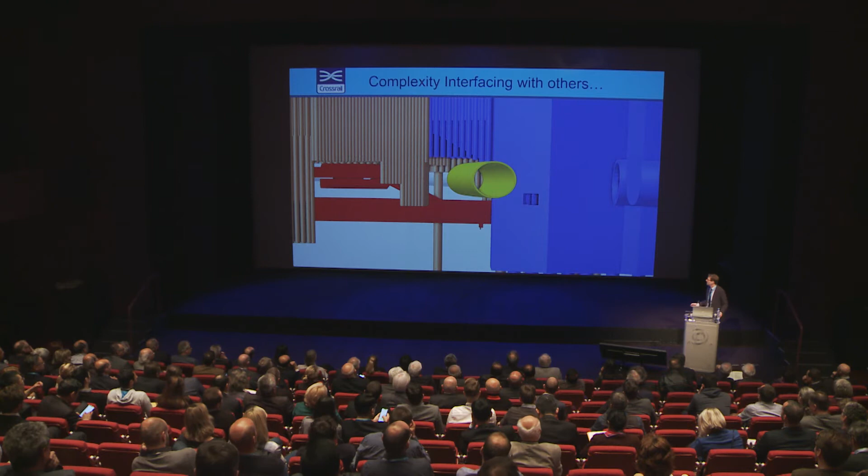This also shows a small video showing the interface with those different utilities and existing infrastructure. You can see the existing line here, this is our TBM coming through here, and this is existing LU infrastructure. These tunnels are 42 kilometres long, 21 kilometres each, so there's 2 tunnels. The distance between the tunnels, the existing tunnels, and the piling was less than 1 metre each side. When you're dealing with that length, the accuracy of the data you need to programme those TBMs was again very challenging.

Also, we had to think about who we were giving our data to. Not only did we need the data we were collecting to be reliable amongst our supply chain, but also we needed to think how we're going to deliver that data onto our stakeholders. So we've got Network Rail, RFL, which is Rail for London, London Underground, and London Underground at TCR. So how are we going to pass over all the information we've collected about our assets so that they can realistically use them in whatever asset management system they have?

And this was a lesson learned perhaps by Crossrail, in that next time we would probably hand over our entire asset management system rather than have our own. We used Ellipse, and then the end user putting those into things like Maximo, just to save cost at the end of the project.

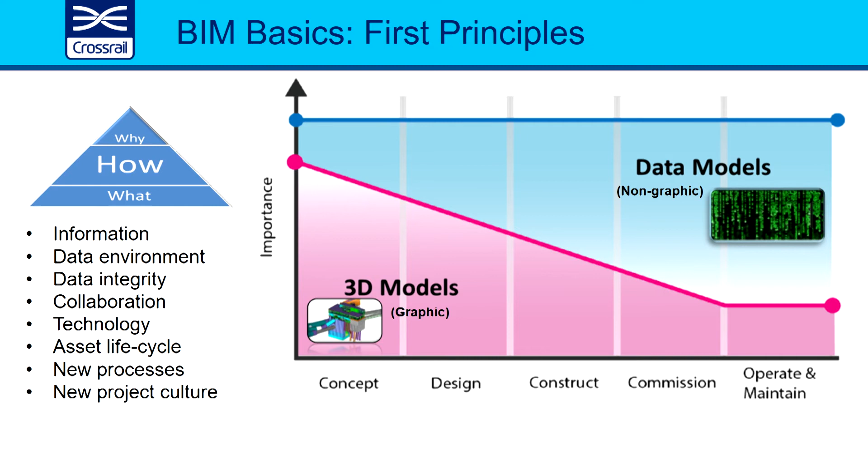So it's very important to educate your supply chain if you want them to follow what you've contractually asked them to do. This graph shows that, again, lots of people think BIM is 3D models, and in the concept and design stage 3D models are very important, but the importance of them lessens, and the data collected against assets increases. So at the end of the project, it's really the data against those assets that is most important.

So with a common data environment, we kept all our data in one single area and everyone would access that. Again, contractually, we made them access it, and all their information went in there in real time and could be accessed by everyone in real time.

So 90% of our data was in 3 linked databases. GIS mapping, which was hugely important to Crossrail, effectively a Google Maps of the whole Crossrail project. You could go into that map, go into a station such as Farringdon, go into a room in Farringdon, and find the asset information associated with that room.

That would then lead you to EB, which is where we kept all our documentation, reports, contracts, health and safety documents, and all the drawings that came out of our CAD. And then we kept all of our CAD in ProjectWise and nowhere else.

So anyone working on the Crossrail project needed to work within ProjectWise in real time, so that anyone changing a model and issuing and sharing it for others to see, people would see it instantly. All these databases are linked, with relationships between them, so you can go from a model in ProjectWise and instantly know where to find information about that in EB.

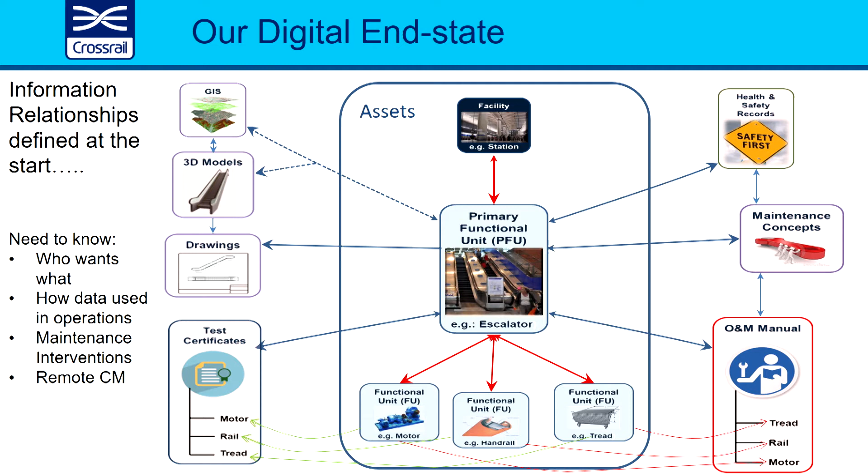If we go further down to a primary functional unit, which is an escalator, information about that will be held in the GIS, in 3D models, in as-built drawings which are PDFs. You'll have health and safety records, maintenance concepts, test certificates, etc. And if you break that down even further to handrails, stairs, or motors, each of these will have an operations and maintenance manual associated with it.

So what we've created is you could start with the GIS, your Google map of Crossrail, and very quickly drill down into how to maintain a handrail on an escalator at Farringdon Station.

So how did we use this data in construction? We again prescribed how people needed to deliver their 3D data. Everything on Crossrail was contractually in 3D, and drawings were cut from that 3D data. So everyone working within ProjectWise would see each other's 3D data in real time.

And that's all about space management - using 3D models to coordinate. It was very important for us to be specific about the file format, so everyone working within ProjectWise, contractually again, worked in a specific file format, specific versions of a specific file format, so that every person's 3D model would automatically fit within everyone else's 3D model, all geospatially correct.

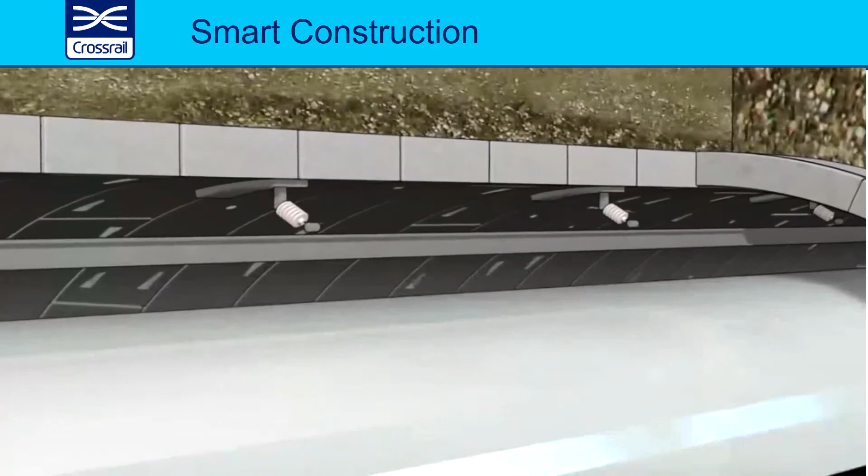And also smart construction. So here we have a train going through one of the tunnels. Obviously, lots of equipment needs to be installed in these tunnels - walkways, CMS, fire mains. A huge amount of manual work would be required to drill the holes necessary for all this equipment.

So each of the tunnels was scanned. This scanned data was then fed into a digital format. All the locations of all the drilled holes were then inputted, and this machine rolled along and drilled the holes exactly where they needed to be, which made the job extremely efficient, accurate, and far, far quicker.

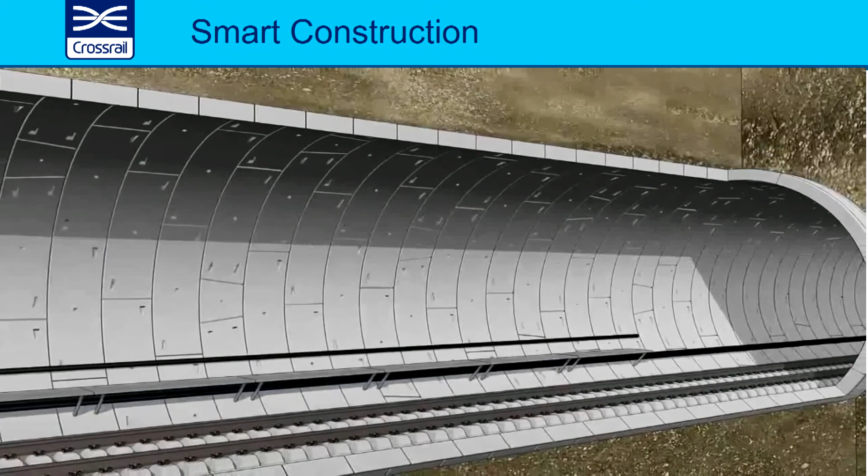We also insisted on project dashboards, which are often forgotten on projects, so that there is great visibility across the project of what other projects are doing, and also visibility up and down the supply chain. There would be weekly, monthly dashboards showing the state of construction across each project, and Crossrail itself produced these.

Using data for asset management, we formulated an asset information management plan, which was instructed to contracts, which they had to follow contractually. This would define our overall approach to asset management, and it would list key supporting documents so that people knew what we expected an asset to be.

For example, I could call this a glass, someone else could call it a container, someone could call it a cup. I could say it's half full, you might say it's half empty. But in Crossrail we had to tell people exactly what we expected an asset to be.

So we would specify in asset data dictionaries what each asset was, what type of attributes to collect against it, so that everyone was clear across contracts and across disciplines what assets we expected to collect. And again, this was written into our contract clauses.

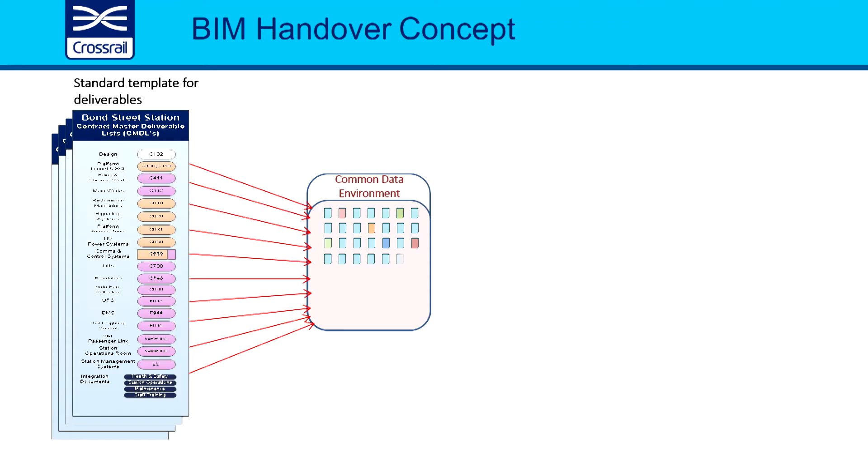So handing over into operations and maintenance. We've talked about our common data environment. Everyone is feeding into this. All individual pieces of information lie in here.

But we have different clients and different stakeholders, each requiring different types of information. For instance, London Underground would require certain information that we would be able to take from our common data environment to hand over to them. RFL might require different information. It might be overlapping, but we can pick and choose from the common data environment because everything in there is consistent and we're not having to go to various areas to find the information that we need.

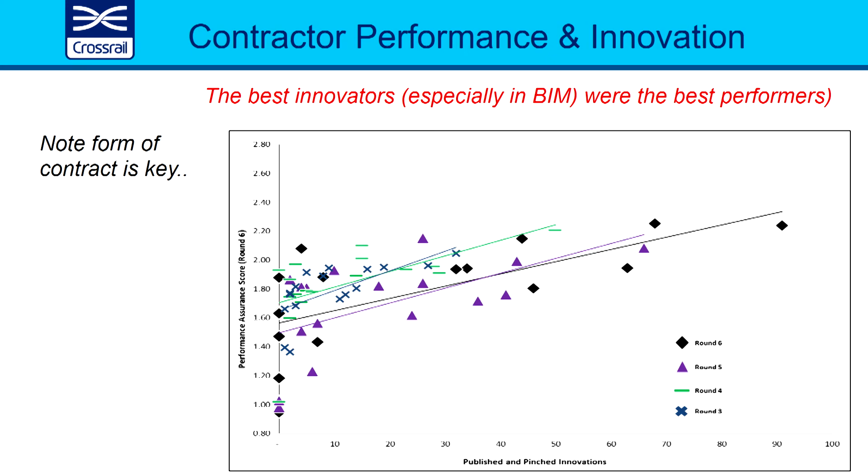So, lessons that we learned. Firstly, we learned that the best innovators in BIM were actually the best performers, which is very encouraging, practically, for the benefits of BIM. We were finding contracts that were willing to engage with us and work towards a BIM solution actually performed better as a contract.

In terms of our asset collection, we needed to define assets, as I talked about in the asset data dictionaries, very, very clearly, because lack of consistency, we found out very early on, causes trouble. We've also found that contractors release asset data as late as they can. They're busy building the station, and collecting data about what they've built is not necessarily their priority. But it needs to be written into the contracts so that they can understand the benefits of releasing that data.

For processes like maintenance and operation, it's not just about building the stations. These stations will be around for 100 years, and it's far more important the data that we hand over at the end of design and construction. Also, maintainers need some asset data early for training, especially on projects like this with new trains and new software. So next time, we'll create and agree an asset data dictionary even earlier.

You may have heard that Crossrail 2 is happening, going from north to south of London, and that's what they're doing - building a complex asset data dictionary early. We need to collect that asset data progressively, not wait till the very end and then try to collect it - collect it as early as possible. And as I mentioned earlier, we'd hand over our asset information systems in their entirety, not just the data, so that it was easily brought in by our clients.

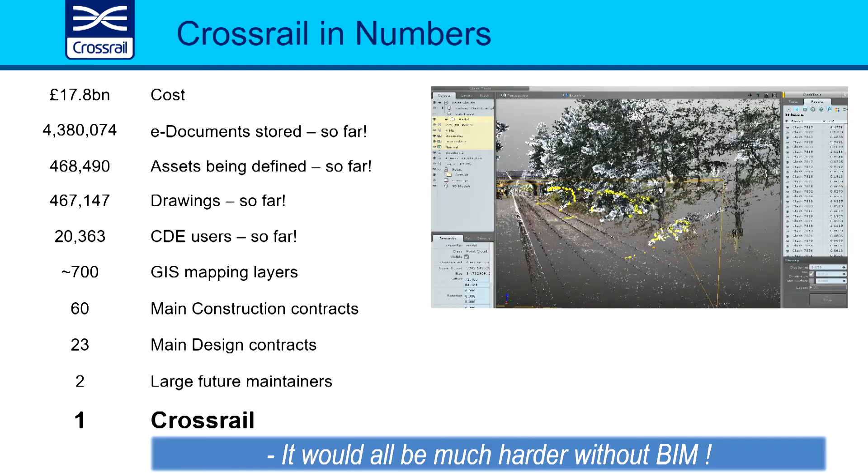And Crossrail in numbers, just to finish off. So it's 17.8 billion cost in the end, over 4 million documents in EB, 468,490 assets that are being defined so far against the ones that have been installed, almost 500,000 drawings so far, all the CDE users and the construction contracts, and it would have all been much harder without BIM.

So in the construction industry, we need to be mindful of this and realise that technology is something that we can embrace and something that can really change the lives of not only us who use it as engineers and designers, but also the people who we're building for. So thank you very much.